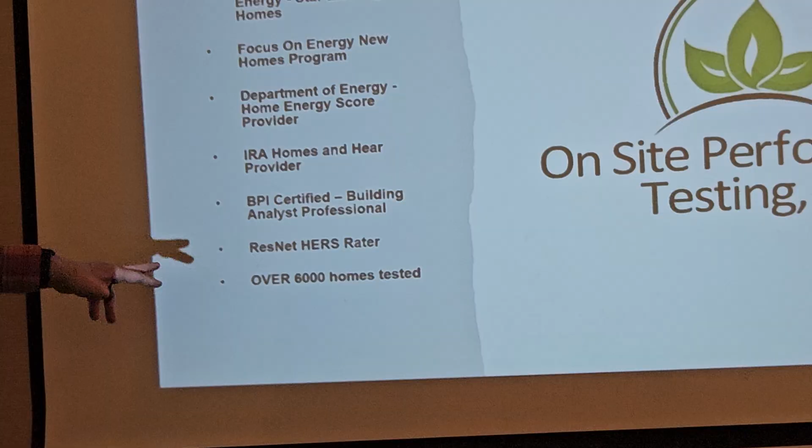And then we also do duct testing. So I don't know how many of you guys realize that in 2016 they passed a code in the state of Wisconsin that any ductwork outside conditioned space must mandatorily be pressure tested and sealed in construction. So if you come up on a house, ask the question: was this done? This number at the bottom here is slightly outdated. We're creeping in on 7,500 houses now.

Blower door testing. Who here hasn't seen a blower door test? Everybody familiar? Okay. Pulling air out of a building, in most cases. We do have the ability to pressurize a structure. We don't do that very often, but there are a couple rare occasions where we have to do that. The house that has vermiculite - everybody knows what vermiculite is, I assume. We cannot depressurize a vermiculite home, but we can pressurize a vermiculite home, because now we're pushing air out of the structure instead of bringing air through that product and into the structure. So in those cases, we will pressurize.

What information do you get from pressurizing it? Same leakage numbers, yeah. We just have to flip my fan around, because it's always a one-to-one exchange. Whatever goes in must come out, or vice versa, depending on the direction. Because otherwise, your pressure would continually increase or decrease depending on which direction you're pushing. If you're maintaining a constant pressure, one out equals one in. So when we depressurize a house, we know how much we're pulling out, but it's only pulling out what it has the ability to pull in. The same thing can be true going the other direction. Because of the vermiculite, you're not pulling it in because you don't want those particles coming in.

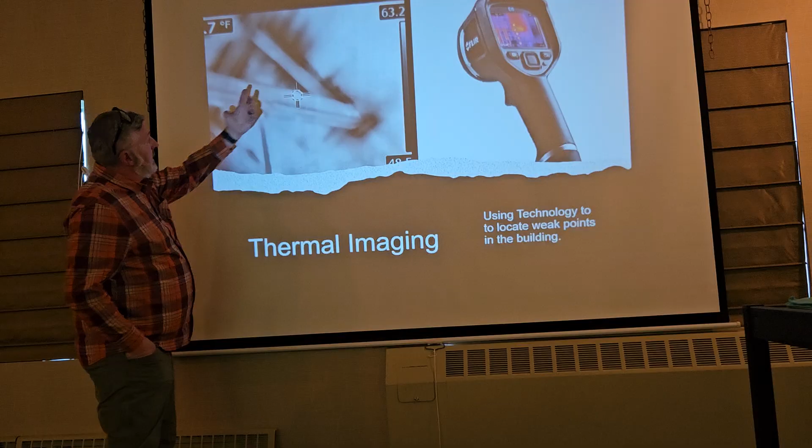So now you can kind of see it - I cut the picture off a little bit, but this is the lowest temperature found on the screen, looks like it says 48. Highest temperature on the screen at that given moment was 63.2. I can't really see what my indicator was, but as long as the external temperature was colder, that's what this is representing, and we were actually depressurizing, so we were sucking that cold air in through the penetrations and openings in the structure.

So what did they have to do to this? They had to go up there and pull all the molding off around all that and inject foam or caulk into those seams to actually air seal things, not only for air movement, but what travels with air? Water and heat. So the air leakage itself probably wouldn't be an issue other than on the pocketbook, but the water is going to ruin the building.

So duct blasting - has everybody seen, anybody ever dealt with duct blasting before and what that's for? This is to determine leakage in a duct system of a building.

So there's a couple different ways we have to do it. In new construction, if the furnace is not in place and we consider the ducting in a rough-in stage, we can just seal off the ducting and pressurize it and measure the leakage. If the whole system's in place, we actually have to pressurize the structure, because the ducts are an extension of the building at that point. So we pressurize the structure and then we can figure out how much the ducts are leaking by pressurizing the duct system to get it to balance out to zero.

So depending on when the contractor actually calls us, we prefer to go in there at rough-in stage, but sometimes they forget to call us and then we get to do it at the end, which requires not only a duct blaster but a blower door at the same time, so it gets a little more complicated.

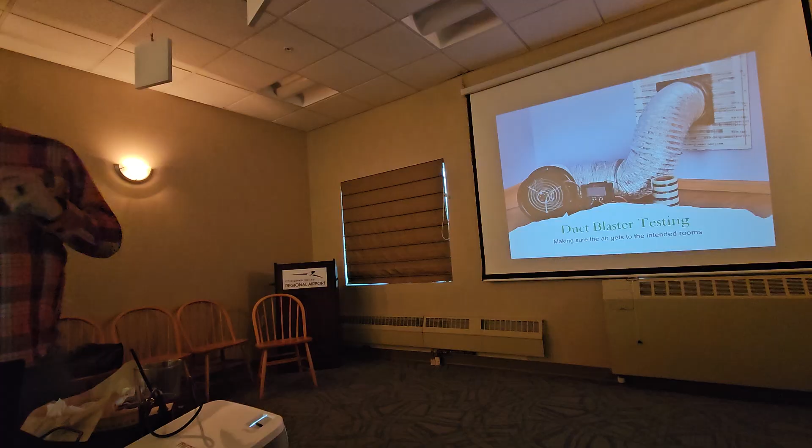This is going to be a much more prominent piece of equipment if the new codes pass in the state. Rumor has it that they are discussing going to either 2018 or 2021 energy codes in the state of Wisconsin in the next 18 months. They're in discussion from what I understand.

And then we do combustion safety testing. So what that generally applies to is chimney vented appliances. We also will test carbon monoxide output on condensing systems.

Does anybody know why that system's a potential problem? I'm sure you guys have all seen them. It's an old oil burner with a barometric damper going up a chimney.

So let's say this customer had this furnace in there and they loved it and it was producing all kinds of heat, which is what they do. But then they decide to air seal and insulate their house and put in a new 600 CFM kitchen exhaust hood. You think that furnace is gonna have a problem?

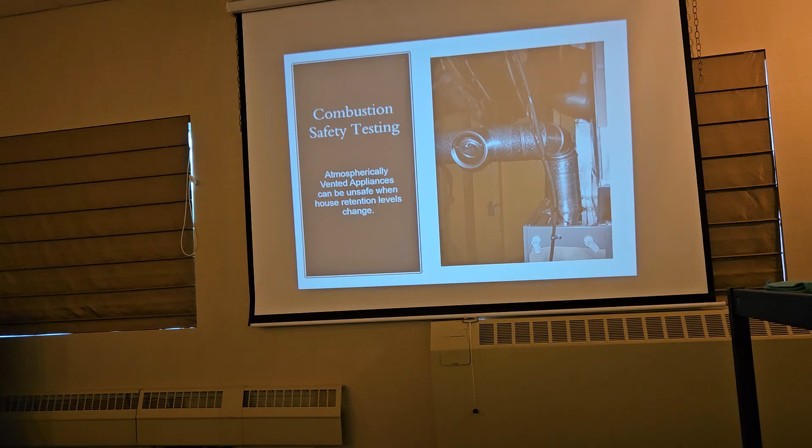It's gonna backdraft that sucker right into the building, and those old oil furnaces put off a pretty nasty amount of carbon monoxide. So these are the types of things we check when we're out on site to make sure that there aren't any problems with those systems that are gonna create bigger problems for the homeowners. So we test those things.

New construction, we get involved with new construction, helping builders and homeowners work their way through that complicated process to eliminate any potential issues throughout that build.

I left all this stuff in here just so I could touch on it briefly with you guys. There are a multitude of different programs in the state of Wisconsin right now as far as energy rebates or incentives for customers and homeowners. Everybody's probably familiar with Focus on Energy. That one's been around since 2001, I believe.

And then about, it would have been August of 24, the Inflation Reduction Act was rolled out in the state of Wisconsin. That money is still here and still being used in the state of Wisconsin.

So there are opportunities for your homeowners to go through these programs and get a bunch of money to help them work through. And this isn't just insulation stuff, this is heating systems, water heating systems, all kinds of different stuff. So again, I'm not gonna spend a bunch of time on this unless you guys have particular questions about it. This just kind of goes through the process.

The one big thing about the Inflation Reduction Act is it's an income qualification. There's 3 different tiers, and I'll hit that in a second. There's money available for everybody. It just, depending on where your income lands, kind of dictates what you're going to be eligible for. And everyone requires an energy test, and then they have to work within the network of contractors to get any of that money.

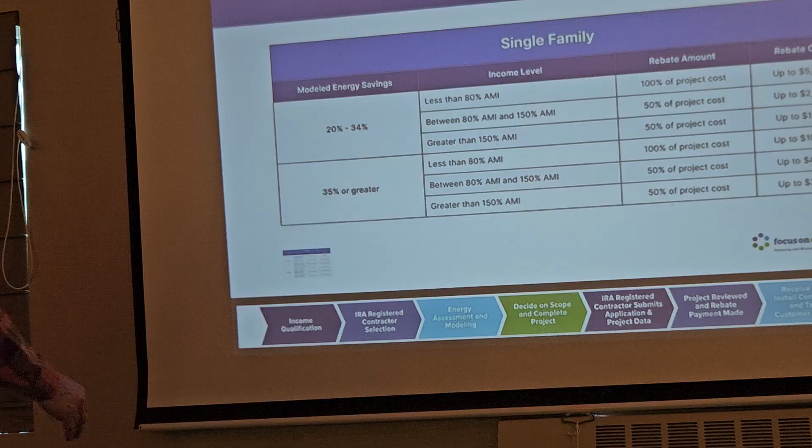So again, as you see there, depending on where you fall on the income scale, we'll ignore this part for now. That kind of dictates where your costs are going to be. This is projected energy savings, and that's all done through the software that the DOE provided for us.

And that can get pretty crazy. So the energy savings numbers are projected by the software, and so when we go out and do an assessment, we have to do basically a full data collection on that structure. I mean, right down to appliances. And then we have to collect all utility information for 12 months from those homeowners, and then we have to take all that information and put it into the software, so the software can align all those values and make sure that everything is entered as it should be.

And then we get to say, okay, well, we're going to change A, B, and C, and based on those changes, it'll project an energy savings score, and then that again dictates where incentives fall.

IRA registered contractors. I tell my homeowners, think about the medical industry, and you gotta go to your in-network things. Same thing. Again, it's government programs.

Energy assessments are required for all that stuff. Combustion safety testing, ventilation equipment, thermal scanning. We went over a lot of that. This is modeling software. Here's a couple cool things that this new modeling software does do.

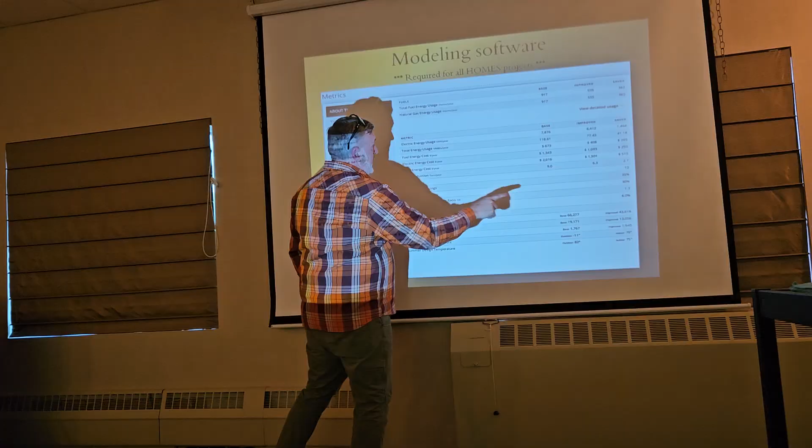It'll tell you your total fuel energy usage, electrical, fuel, CO production, if you're into that. But here's your total energy savings. I just grabbed a random house, but this house was going to see a 35% energy savings.

Here's where it gets interesting from my perspective. So based on the workload they were doing, here's your heating loads and cooling loads. This is pre, this is post. So by doing the insulation work, they've actually lowered their heating load requirements for that particular structure and their cooling load requirements.

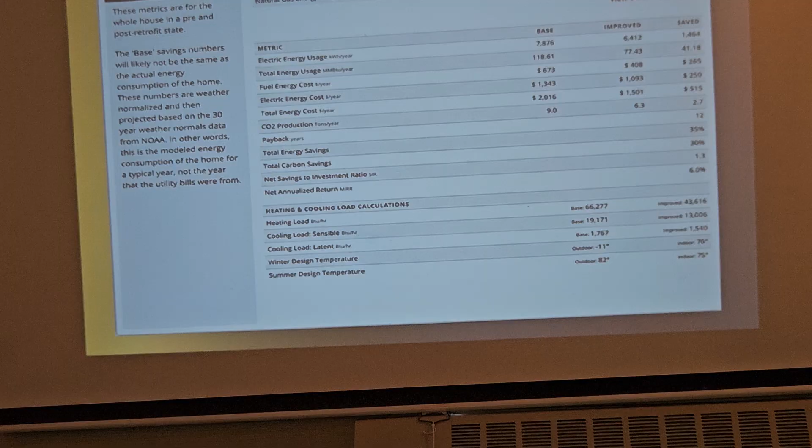How many of you guys have walked into a house and you're like, oh, this 1,200 square foot ranch has a 100,000 BTU furnace sitting in the basement? That's terrible. So when we do these things, we can actually say, even based on your house in its current state, what their projected heating load is, and then they get to call their HVAC guy and say, what the hell did you put in my house? Because it's going to short cycle, or they put a 4-ton air conditioner in there and the load's only 12,000 BTUs, right?

So this is a really useful screen. It's one of the reports that this thing generates. Most homeowners don't know any of that information, but for people in the know, it's super useful.

And this was the work scope that was happening. I think this is the same building. They were doing air sealing and increasing their ventilation, and usually that's a new bathroom fan. They were obviously doing probably an attic rework with the air sealing in attic, probably box sills in the basement, then they must have been dense packing the exterior walls of the structure.

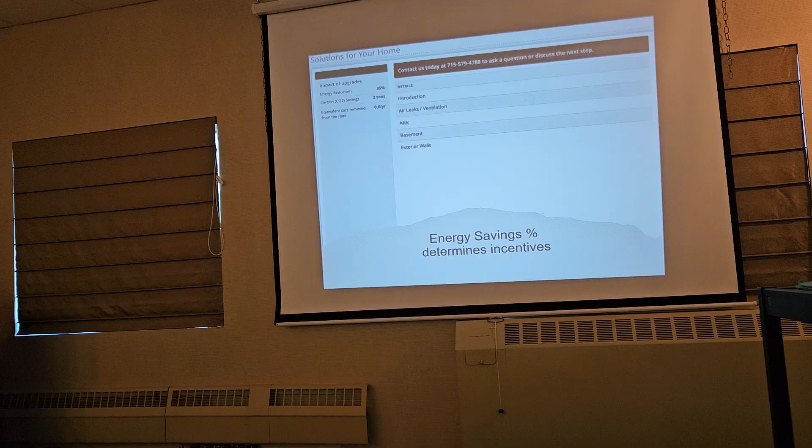Then this kind of just goes through the process. You determine your work with your primary contractor, have your work completed by your contractor.

And this just talks about the different processes through that program. We're going to get into a bunch of this stuff. The quality installation side is every project gets QC'd in that program, and the Focus on Energy program. So not only do we QC the projects we work on, the program actually QCs every single project in the IRA program as well.

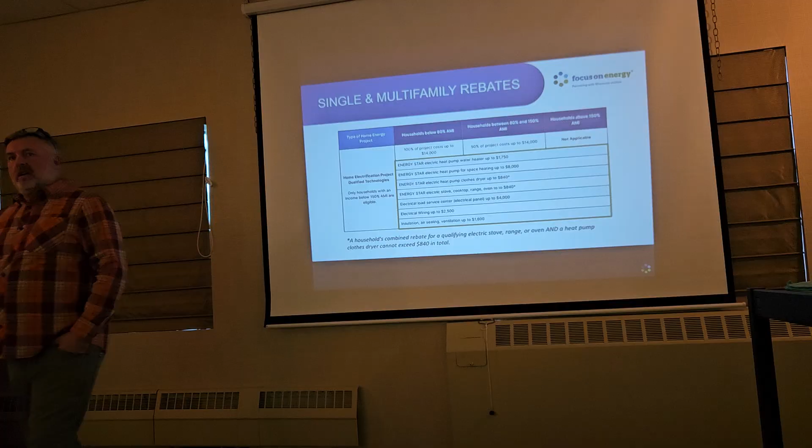And then they got multifamily stuff. This is the heater side of it. This is your heat pump water heaters, your heat pumps, your clothes dryers. There's even some money in here for, and I'm sure you guys see this opportunity a lot, your load service or your panels. You walk into some of these old farmhouses and they still got fuse boxes in them, right? Or 100 amp services. There's up to $4,000 to have a 200 amp service installed. And then there's some additional wiring here. This usually comes into play if there's a safety issue, an old fuse box or knob and tube wiring falls under that one too. So there is some opportunities on that side of the scale for that.

That's just eligible equipment, heat pumps, blah, blah, blah. You all know what those are, right? You guys been seeing some of those popping up out there?

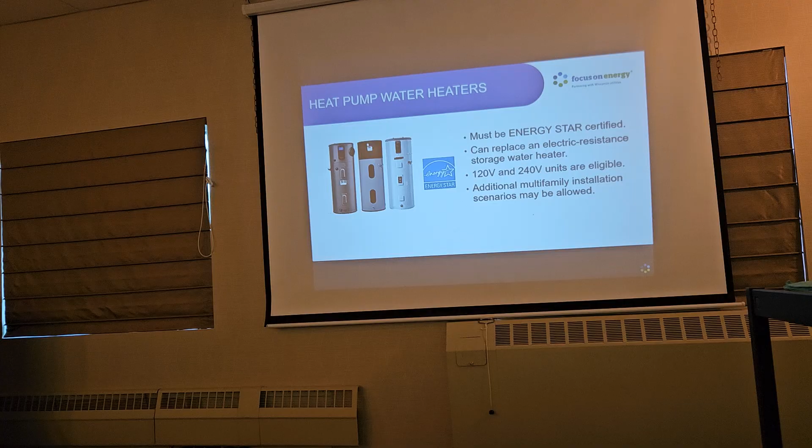I have a question about those. Just thinking about it in my head, so it's pulling the heat out of the air, putting it in the water, right? Essentially. So I can see how that'd be awesome in the summertime, but in the wintertime, aren't you just taking the heat that you paid, the air that you paid to heat? Yep, and I got a slide in here later, but we can touch on it. I just say you're robbing from Peter to pay Paul, right?

So what the industry has done is in these little control panels now, they've given you the ability to turn the heat pump mode off in the wintertime. So in the wintertime, they're just standard electric systems. We'll touch on those a little bit more with some pros and cons as we get deeper into this. That's typically what I kind of tell people is that I would switch it to an all electric. Absolutely. And that totally makes sense, right?

How many of them do you think? Idiot here. How many of them do you think will actually do it? No.

Right, exactly. Okay. So I'm not wrong in saying that.

One thing you guys should watch out for, and I'll touch on this again as we get deeper: these systems require a 15-foot radius around them. You can't shove these in closets because they rely on the temperature of the air. Imagine shoving that thing in a closet - it's cooling that closet over and over, and pretty soon there's no heat for it anymore.

So, could you store your meat in there then? Probably, yeah.

Little side story - I got a builder up in Minocqua. He bought an old house, completely remodeled it, an old 80s split level, walk in, go up and down. He put one of these in a utility room that was about 10 by 10, and that utility room happened to be open to the basement. He was allowing that thing to cool that area, and all that cold air was dropping down into this little storage room in his basement.

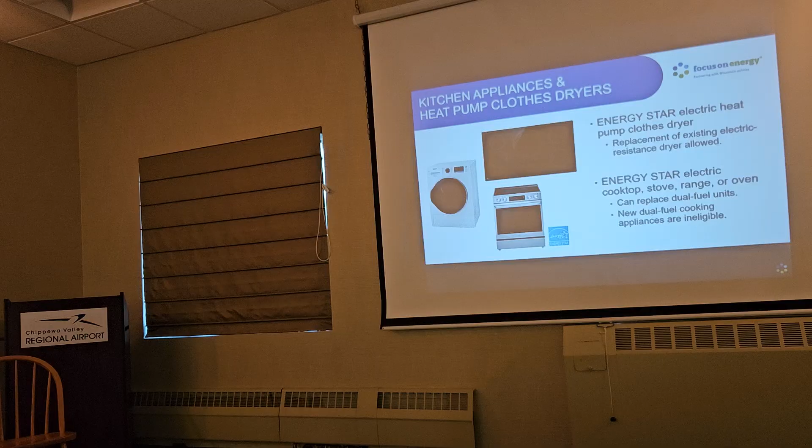Pretty cool, more stuff to break and go around. Well, that's today's world, they're all gonna break. You know, washers and dryers last 4 years now, and they're twice as expensive as they used to be.

I'll give you a firsthand example. My daughter lives in Atlanta, and she bought this 2-story house, and she wanted to put a laundry room on the 2nd floor in an internal wall, in an internal closet. She didn't want to have to get an exhaust pipe out, so she put one of these in there - problem solved. All you gotta have is a condensate drain, because they don't exhaust.

They don't exhaust, they're heat pumps. There's no exhaust on them. And it's an all-in-one - you put your clothes in there, it washes them, then it dries them, and then it tells you they're done. Takes about an hour 45. So I'd say one of the downsides to them is capacity - you can't overload them.

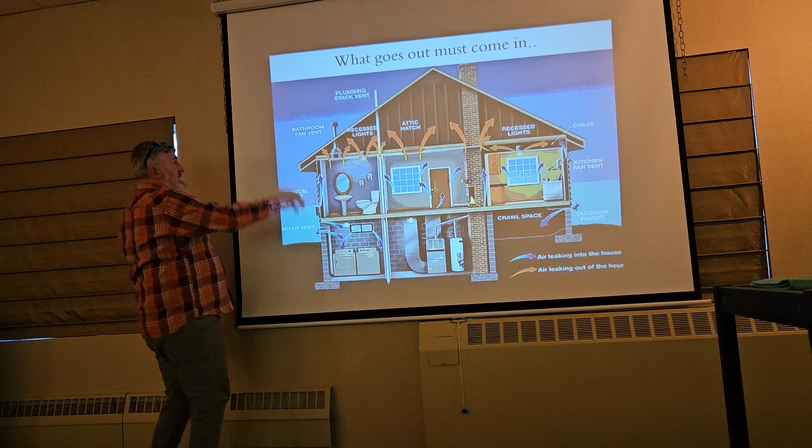So we'll get into the building science stuff. Again, some of this, I know a lot of you guys understand. This is an example of stack effect and how the pressure in a building works during your typical heating season. Red arrows are exhaust, blue arrows are intake, and the taller the building determines where your intake stops and your exhaust starts. So if this was a 2-story or 3-story building, that pressure scale changes as you move up and down the structure. But what goes out must come in.

So the leakier your attic is, the more your building is going to compensate for that by pulling cold air in wherever it can. The bottom of your house is always your lowest pressure point in your building. The top of your house is like Dave from our office says, your house is nothing but a hot air balloon that's too heavy to get off the ground. So the pressures are upward and outward.

So the objective is to try to seal up as much of that as you can, and then, and only then, do you worry about the actual physical insulation or R-value piece of it. And we'll get into some insulation stuff here too.

But this one I'm sure you guys deal with, or at least see the aftermath of when you're doing home inspections. How many times do you go through and look at the bottoms of the windows, especially on wood windows like this one, and that's all black or the stain's all gone. It's not a window problem 90% of the time. I mean, you got your rare occasions where somebody left a casement window cranked open when it rained and it caused a problem, but most of the time this is an internal humidity issue.

This is a big one. Window coverings make it worse. You see all these companies out there now that love to sell those pull-down honeycomb accordion shades. We call them window wreckers, because they actually have thermal capability and they will keep a little bit more heat in your building, but at the same exact time they are going to create dew point issues on the back side of that window and will absolutely destroy your windows.

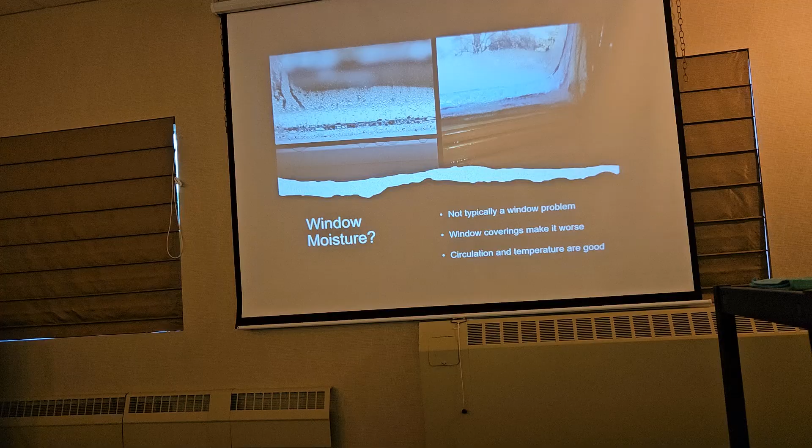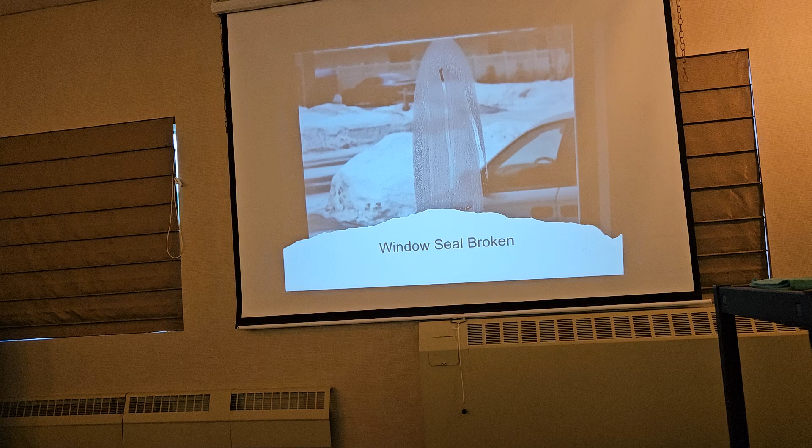Broken window seals. Everybody's seen those. Do you know why that's doing what it's doing? Why is that moisture forming in the middle? Flexing towards each other, yes, but only in one direction.

Heat always travels warm to cold. So in the wintertime, when you see this, what's happening is that glass pane on the inside is concaving and flexing to try to touch the outside pane. This is a pretty big picture window, so that glass has a lot of flexibility to it. Have you guys ever shown up on a job site and seen a window like this where either the inside or outside pane is shattered? That's because the seal was shot and it didn't have enough flexibility based on the operating temperatures happening internal and external, and that glass finally got to its literal breaking point and shatters internally.

I've seen it go both directions. Happens in the winter, obviously, on the inside pane, but I've seen the outside panes do the same thing when people are air conditioning to 63 degrees in the summertime on a 95-degree day. You can have the same impact, just in the opposite direction.

This is kind of a guideline, and this information's out there, you guys can find this wherever. There's also this version where you can actually calculate it out. In air temperature, the one thing they don't have in here is the window, because the window is the other piece of the equation. A single pane piece of glass is going to condense quicker than a double pane, quicker than a triple pane. But you can get these charts out there too.

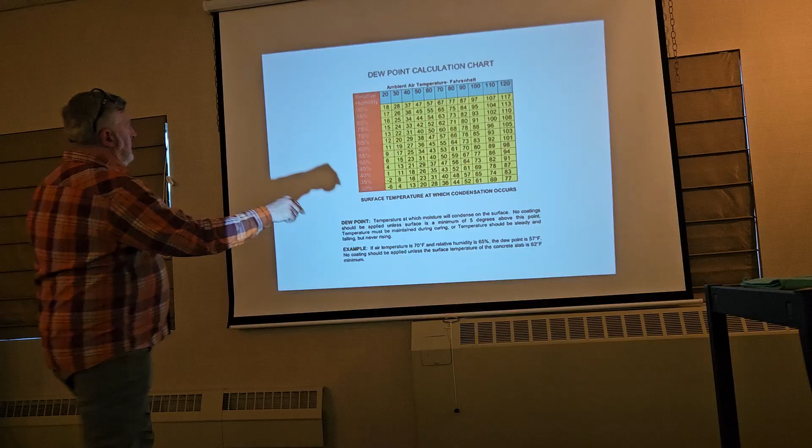So you can actually say, okay, it's going to be 20 degrees today, and my humidity in my house is 40%. So you can be proactive. Start getting my humidity down because I know it's going to get cold outside. It just gives you a good ballpark idea.

If I go back to this other one, for most people this is a pretty safe zone right here, 30 to 35%. How much of our time do we spend below zero? Very, very small. So we adjust accordingly from those points. 30 to 35% is a pretty safe zone. And those temperatures are based on lows, not highs.

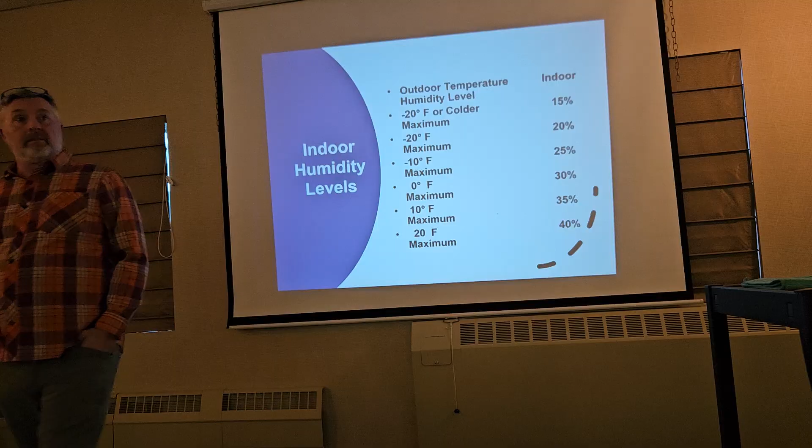Do you know what the medical industry tells you? This is as low as they ever want you to go, and they want you to go all the way to 60%. If you do that in the state of Wisconsin in our winter, you are going to have problems. And it's always young moms, oh, my doctor said 55%, I gotta keep it at 55%. I said, what's worse, a little dry air or that? Because that's the alternative.

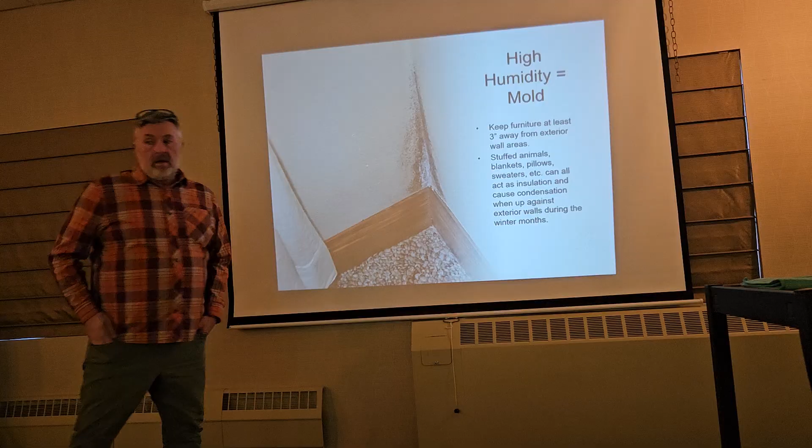This one, can't tell you how many times I've walked into a little kid's room, there's a stack of stuffed animals against the wall, and you stick your hand behind it and it's dripping wet. Because what does every young mom do? They stick a vaporizer in that kid's room because they coughed once, and now they saturate that space, and the back of all those stuffed animals, which you know they're gonna shove in their mouth because that's what they do, are likely covered in mold. And they don't like to listen.

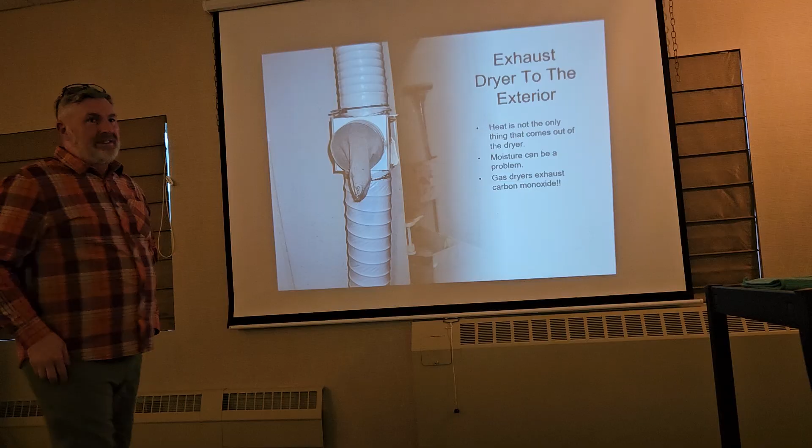Yeah, that's a no-no. And how about if they're doing it in that situation? What else does a gas dryer produce? Carbon monoxide. Also, the plastic tube is nice.

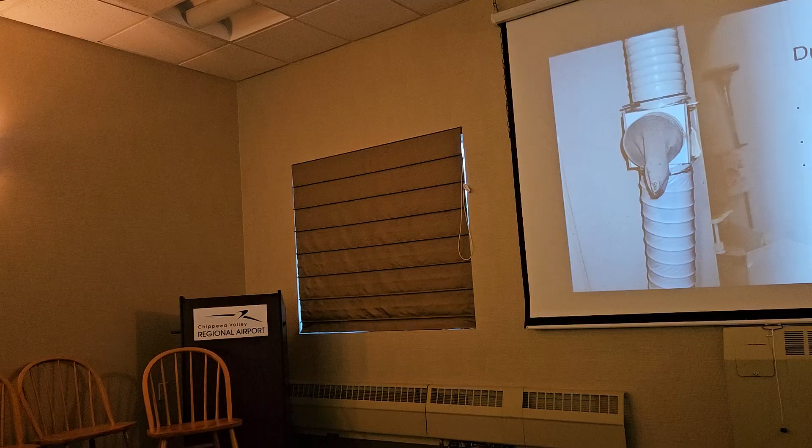Right, and that's another thing. Good catch. Plastic does not belong on anything that gets hot. So how many of the houses you go out that are vinyl sided have vinyl flapper discharge points for a gas dryer? It's gonna warp those things in about 6 months, and that thing ain't gonna stay shut. If it's hot, it needs to be metal. Plain and simple. Don't overcomplicate it.

We're getting into a little bit of combustion safety here. You guys have all seen these atmospherically vented water heaters, and then somebody told them that if you insulate around your pipes, you'll save a bunch of energy. Oh, yeah. Or you could melt them and start your house on fire.

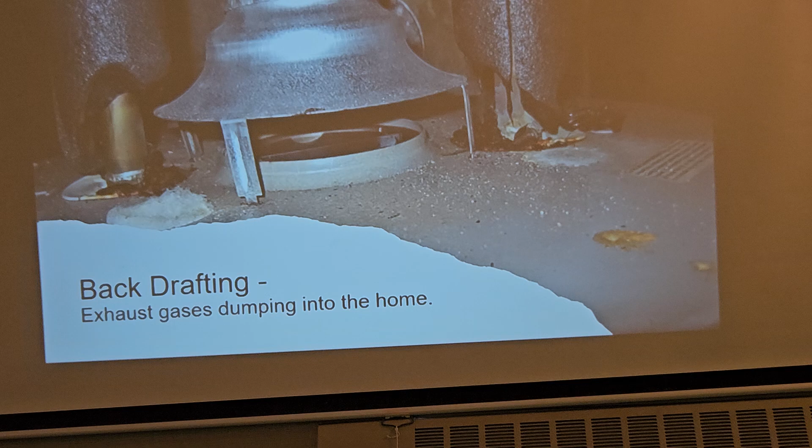First thing I do when I walk into basements and I see that pipe wrap on there, take it off and throw it on the floor. Say it doesn't belong there, it's a safety hazard for sure, or I'll hand it right to the homeowner and say throw this away. And once you bring it to their attention, they're usually pretty, oh, holy shit, you know?

But does everybody understand backdrafting and how that happens, and what it is? Explain it. Good, okay, for the video. So...

I wish I had a better picture. So one of the things that, and this should be maybe something you guys watch for too, and I don't know what your rules are, does everybody understand why water heaters have a 3-inch chimney?

Or better question, what determines the size of a chimney? How much heat is actually going up that chimney? If a chimney gets too big, and you see this a lot when the chimney used to supply the furnace and the water heater, and they left the old 6 or 8 inch pipe going up. Well, now the furnace has been changed out to a new condensing system, so that's not using it at all.

So now you get this orphaned water heater that's now 3 inches, maybe 38,000 BTUs, dumping into a 6-inch pipe, and you see what looks like water running down the outside of the pipe. It's not drying that chimney properly, and it's also not drafting well.

Chimneys have to be sized based on the BTU output of the appliance going into them. That also applies to old wood burner fireplaces and things too. As these systems get more and more efficient, there's less heat going into those chimneys.

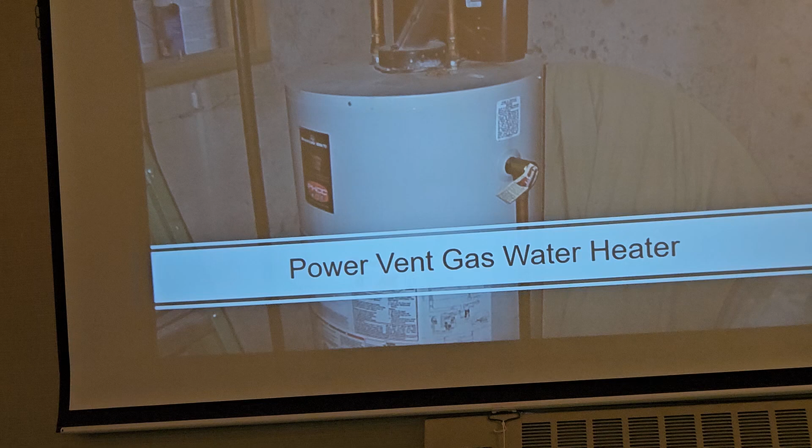This is a solution to that problem. It's got an inducer motor, just like your furnace does. Now, some people don't like these because they're noisy, but I guess I'd rather have a little hum in my basement than gas in my basement.

So, can you convert? You can't just convert. Years ago, you used to be able to buy conversion kits, but my recollection is there was a point probably 10 years ago where the retrofit kits were more than the water heater itself. So everybody just started replacing their water heater.

I've on two occasions seen people remove a power vent water heater, put in a natural draft, and connect it to the PVC pipe. That's a bad idea. Of course it goes horizontal across the basement, and not only that, it melts. And not only that, power vents are more efficient, which allows them to use PVC, because that's all based on heat production again. That's a terrible idea. Yep, the PVC's turning black.

I had one time that was a chimney vent that went up into an old chimney, and on the other side of the chimney, the dryer went up into the chimney. Every time they turned the dryer on, they were basically blowing out the water heater.

Electric standard water heaters, the most expensive way to heat water, but pretty bulletproof for the most part.

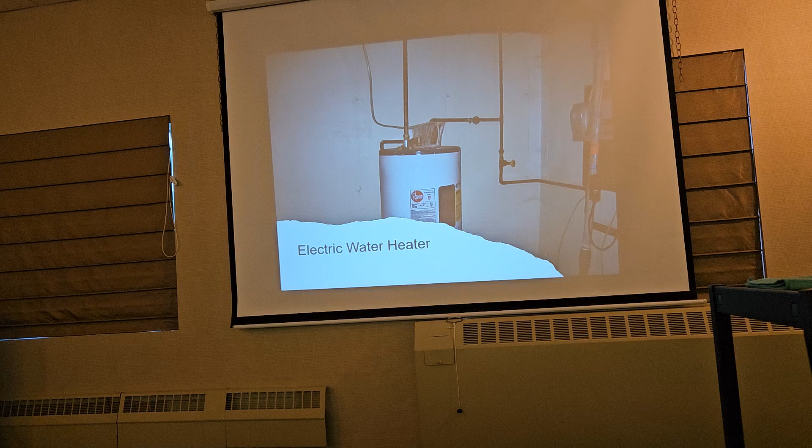They serve as a dehumidifier, so now we've already eliminated another product out of that person's basement. And in the summertime, awesome, they're taking all that heat, they're actually cooling a 15-foot radius between 10 and 15 degrees with average use. And of course, the more it's used, the more it cools.

It robs from Peter to pay Paul during the heating season. That's a con, in my opinion. That's why the industry, when these first hit the market, they were heat pump only. Over the last 5 to 7 years, they've actually started to add those modes.

And they have to have ample space to operate, because you will create a literal walk-in cooler if you put that thing in too small of a space. And when there isn't ample heat for that to draw from, you're affecting its efficiency to do its job. At that point, you might as well just turn the dang thing into a traditional water heater.

Now, my dad has one of these in his garage in Florida. All day, every day, couldn't be better. Cools his garage down. There's so much freaking heat down there, it don't matter. Fantastic application. We don't live in Florida, so.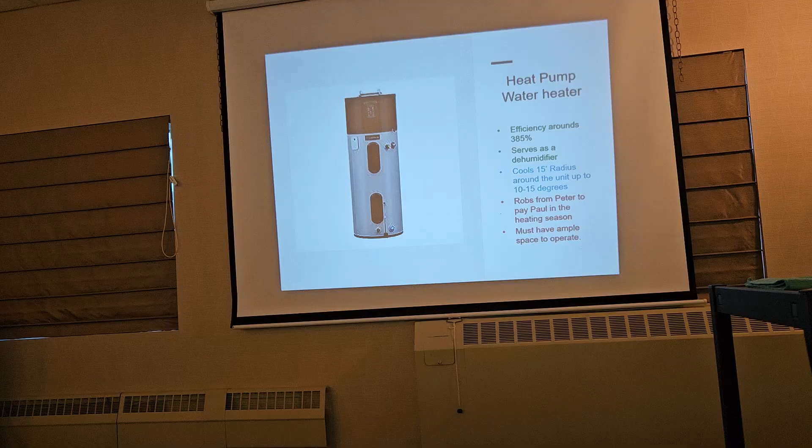I actually took that drain valve out, because it's not a full-size 3/4 inch valve. And I put a full 3/4 inch valve on there. So when you open it and drain it, it drains fast. Oh yeah, you can get a lot of stuff out there. You guys ever see these?

Maybe. These you're generally gonna see, so for those of you that don't know what they are, they're circulation pumps. And they're generally set up in houses where you've got a second-story master bath on the opposite corner of the building. And they don't wanna wait for water.

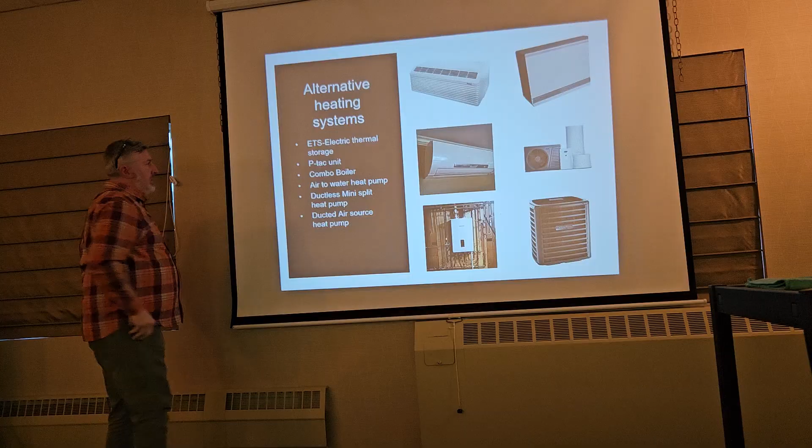Everybody, I'm sure if you've been doing this for any period of time, you know what these ETS systems are. Anybody that doesn't?

So ETS stands for electric thermal storage, that's the one in the upper right-hand corner. Those were super popular in the early 80s, when all electric homes were popular. That was also a time when they were doing a lot of on-peak, off-peak heating. Basically, there's a pile of bricks inside that thing. At night, when electricity was cheap, it would not only heat the house, but it would heat the bricks. Then during the day, when the electric got expensive again, it would basically just run a fan that would blow the heat off those bricks to maintain temperature in the building until the electric got cheap again. They're actually pretty effective units in the right situations. You're not seeing too many of them anymore.

But the north end of town here in the Planets, that was a very electrified neighborhood at one point in its life, in the 70s there. So I've seen more of them in that neighborhood than probably anywhere else in the state.

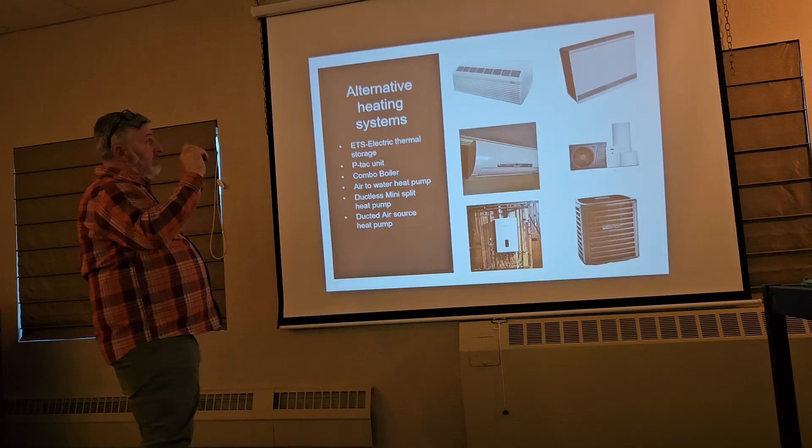PTAC units. Anybody who's ever stayed in a hotel knows what a PTAC unit is. All these multifamily structures that are getting built everywhere, PTAC units. They're basically electric resistant heat that go through the wall. So they are leakers, the air literally goes right through them. They do make a heat pump version of that, but usually by the time you switch that to a heat pump version, your costs get you to a point where you might as well put in a mini split. But you see these a lot in those multifamily structures because they're cheap, and those builders like cheap.

So, combo boilers. See these a lot with in-floor heat, and then they can also handle domestic. Pretty good, but they have to be maintained. They have filters in them, and they have to be serviced every year for sure, if not even a little more frequently. But pretty good.

This is one of the newer things you're going to start seeing in the market, air to water heat pumps. You guys probably all know geothermal, right? That's typically either water to water, which would be geothermal to in-floor heating, or water to air, which would be geothermal to forced air heating. This is the backwards version. So this is actually an air source heat pump that can heat water for an in-floor heat system. So the technology is getting better all the time.

When you get into these inverted, slim, long inverter compressor units, 20 below zero is pretty obtainable for most of those. Mini splits are talking minus 31 now for 75% capacity. It's pretty similar outdoor units, it's just that now there's a conversion from air to liquid. So you're gonna start seeing these, they're getting to be a lot more popular.

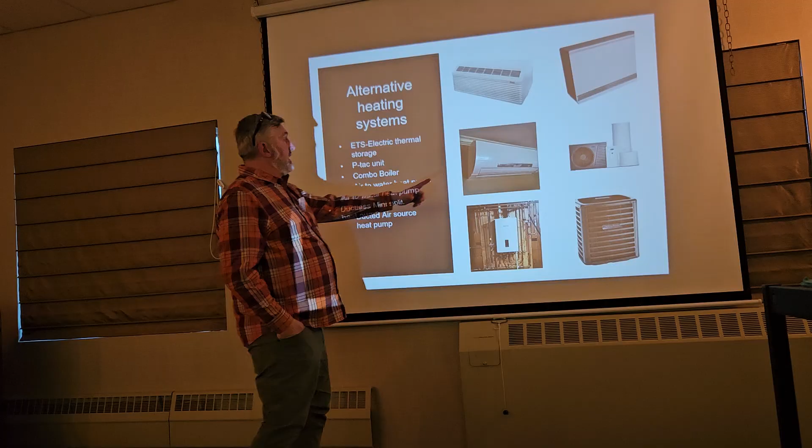And I'm sure by now everybody's seen the ductless mini splits. In those, I'm seeing a lot of mold on the inside of the unit, if they're not keeping them clean. People don't know that they need to maintain them. Also see a lot of issues where when they mount them, they drill the holes through the wall and don't do anything with them, just drill the holes and walk away.

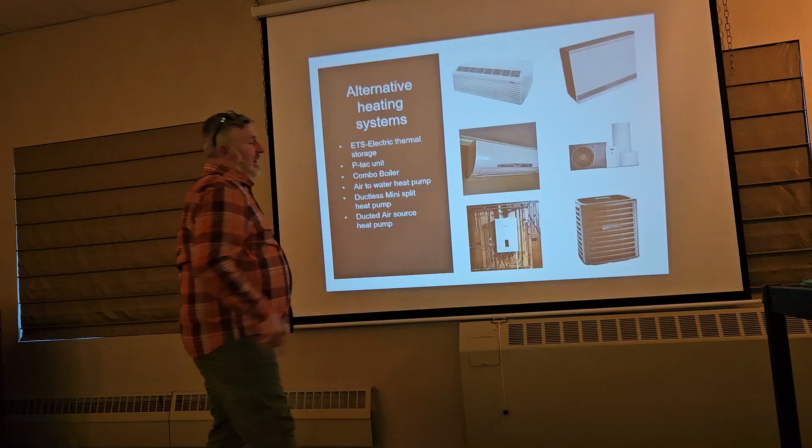But as far as function is concerned, that's about the most efficient air conditioning system you can put in the house. We're talking 22, 23 SEER on a lot of those now, compared to your traditional systems which are 13, 14 on average nowadays. Compared to this, your traditional air source heat pump, the ducted version, even most of those are gonna be 15 to 17 SEER, and those are gonna tap out usually around zero in today's world.

So mini splits are getting really, really popular, specifically in slab houses, because you don't gotta run any ducting. You can put a head in each space and keep each space a different temperature. They dehumidify, they actually have a really cool dehumidification mode you can put them in, where they alter the temperature in the room less than 1 degree, but still pull moisture out of the air. They run at such a slow cycle. So some pretty cool things out there.

Everybody know what HRVs, ERVs are and how they work?

Do we want to waste any time on those? Does anybody not know what they are or how they work? What's the difference? Look at the back. What's the difference? I'm gonna ask you guys. Does anybody know what the difference is?

One belongs in this climate and one doesn't. Do we know what they stand for? Yep, one has the ability to dehumidify and the other one does not. And that's important in our climate. HRVs do not have the ability to control any water. ERVs do, to a point.

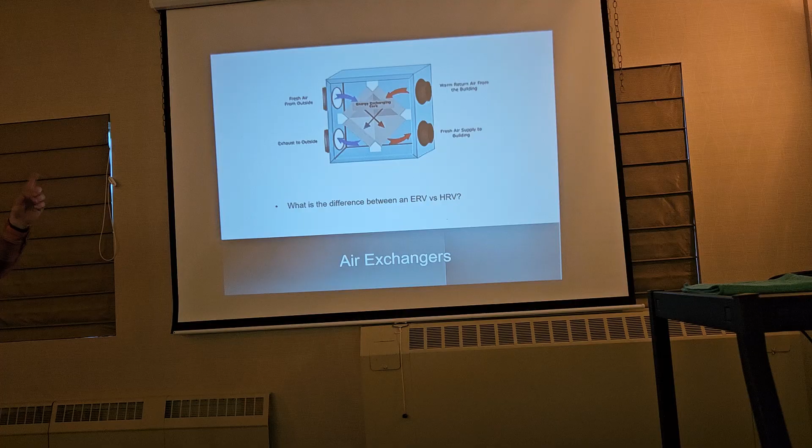Can anybody tell me what the approximate recovery efficiency of one of these is? It's around 70%. They vary, but on average around 70%. So if they've got a 70% recovery rate, that means they have a 30% loss rate. So if that thing's on high and running all day, every day, am I not just pumping 30% of my heat out the side of my building mechanically all day long? So what if I combine that with a heat pump of any kind?

So let me back up. Who can tell me what the biggest problem with heat pumps is? Lack of capacity. Heat pumps are designed to maintain temperature really well. They suck at changing temperature because they don't have that 80,000 BTUs of propane to throw at it, right? Most of them are going to be between 36 and 48,000 BTUs on the high end.

So if I'm pumping 30% of my heat out the side of the building and my system is already a little bit undersized because I'm trying to save some energy - I can't tell you how many times I've been on geothermal projects where their energy bills are $800 a month, but that thing's been running for 12 years. Shut it off, all of a sudden the geothermal can take a breath and catch up, and then it can do its job.

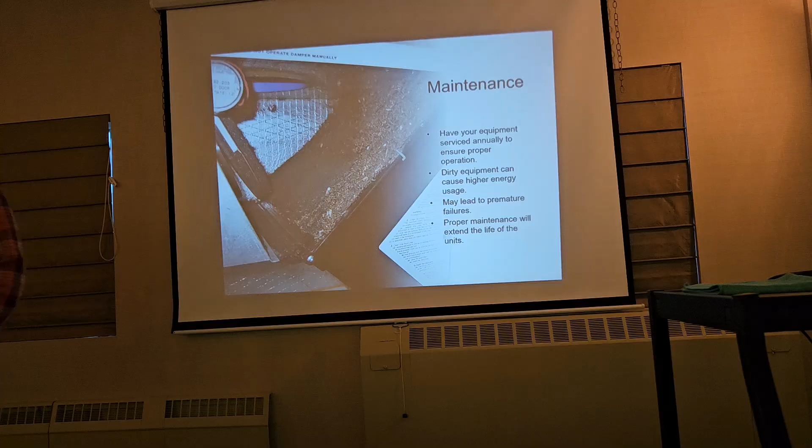So are they really getting fresh air? To be determined, I think. And how many of you guys check the outside ports on them? There's bees in there - a lot of times there's bees in them, because these holes, in some cases, are big enough to let bees in. And you can ask a homeowner, when was the last time you cleaned that? They're like, what's that? We had no idea. Didn't even know it was there, much less what it was for.

So if you're not going to maintain something like that, and you're not going to run it right, don't put it in, because you're just going to create more problems and more trouble with your house for doing it. Do you guys check furnace filters? How many times have they caved in and fallen in the furnace? Haven't been changed in 7 years. Arrows backwards - yeah, arrows are backwards. Yeah, but then you can just flip it around and it's good again, right? Yeah.

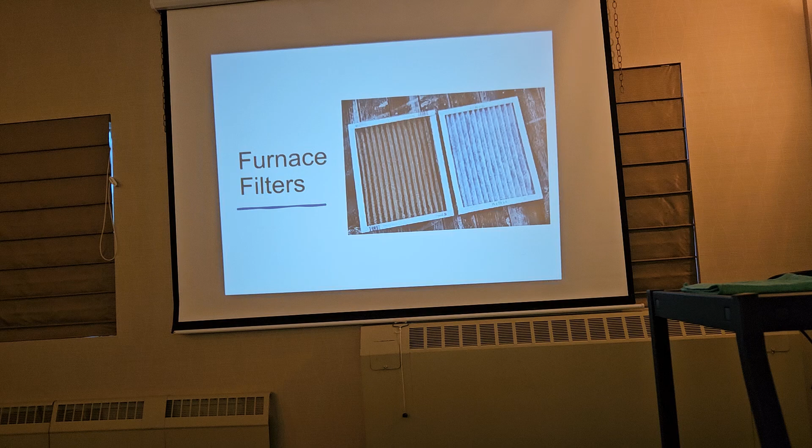I looked at one recently and sent the picture to Jen - it was like a full dog in the filter. Oh, you should see AC coils when that happens. I had a friend who used to have an air conditioning company, and he sent me a picture where he pulled an inch of dog hair off the bottom of the AC coil above the furnace.

It's a good thing there's people like that, otherwise we wouldn't have jobs. Yeah, there's truth to that, for sure.

Place in Menominee I looked at, they had just this tiny little trap door on the floor to go down to the crawl space. Furnace was like 5 years old, and I don't think the people that bought it even knew what was down there. The filter had never been changed since it was brand new, and the crawl space is probably wet and damp.

So switching gears, now we're gonna start getting into insulation a little bit.

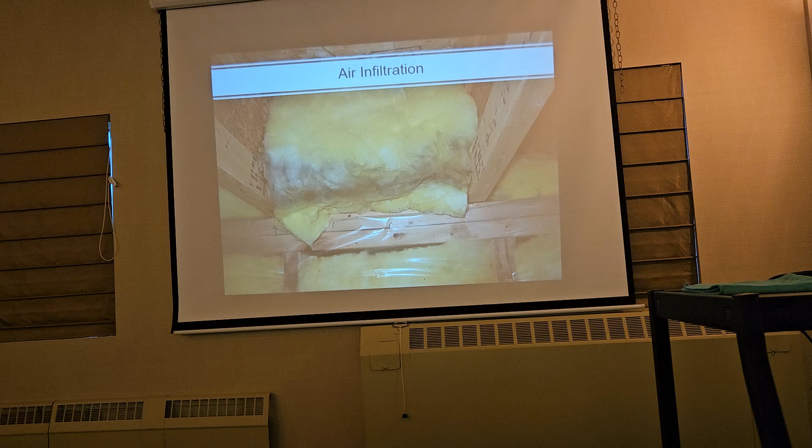Do you guys pull those out ever? Do you ever grab those and pull on them? You ever do it in the winter and they're frozen to the outside of the house? There's suspicion of...

Oh, looks a lot better on my screen. Rim joist, sill box.

Mold - don't like to use that word because I don't test it to see exactly that's what it is, but I think we're all mold-like substance, mold-like stuff, there you go. Possible microbial growth, yeah.

So now, usually you'll see how they kind of fix it - they cut out that pink foam and spray foam around it, and shove that in there. Is that not just trapping all that moisture behind it still? The moisture came from inside the building, so that would be a better scenario than the fiberglass. But the problem with the rigid foam is there's still an air gap. Air gaps are breeding grounds. So the wood, in theory, could still travel some moisture through the wood itself.

This is a better option because the foam bonds directly to the wood, eliminating any air void. So now any capillary action that's going to take place is either going to take place in the wood itself or outside the wood, okay?

Nobody's going to say, what about the off-gassing? The internet's a wonderful place sometimes. As long as you're not there puffing and trying to get hot. Well, and as long as it's installed properly.

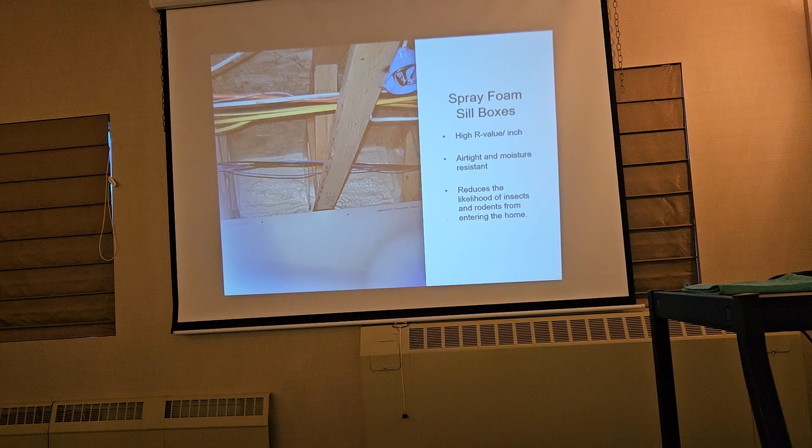Anybody know how to tell the difference between closed cell and open cell when you're on the job? Poke it with your finger. If your finger goes into it, it's open cell, and it should be noted. Like great stuff, soft - well, even some of the great stuff has a little bit of rigidity to it, but true open cell foam, you can literally push your finger right through it with very little resistance.

So what's the difference between closed cell and open cell from a performance standpoint? A little, but that's not where I was going. Vapor barrier, vapor barrier - open cell foam is a kitchen sponge. If it's hard to the touch, it's closed cell because it has closed its cells, so therefore it is no longer air permeable or water permeable. Open cell foam will literally absorb the moisture to the surface.

Seen many houses where they had to tear complete roof systems off because they used open cell foam. Why did they even make open cell foam? Where is its purpose? It was cheaper, and there are some applications where open cell foam can fill large voids. And you can use open cell foam, but then you have to implement a vapor barrier in addition to that.

So open cell foams were good for - I guess the easy analogy would be cathedral ceilings where you got massive roof trusses - they could fill the whole thing. The mistake most of them made is they never put a vapor barrier on it, and the thing just became this massive sponge on the top of their house. But if you vapor barriered that, did everything correctly, it can be a pretty effective R-value boundary.

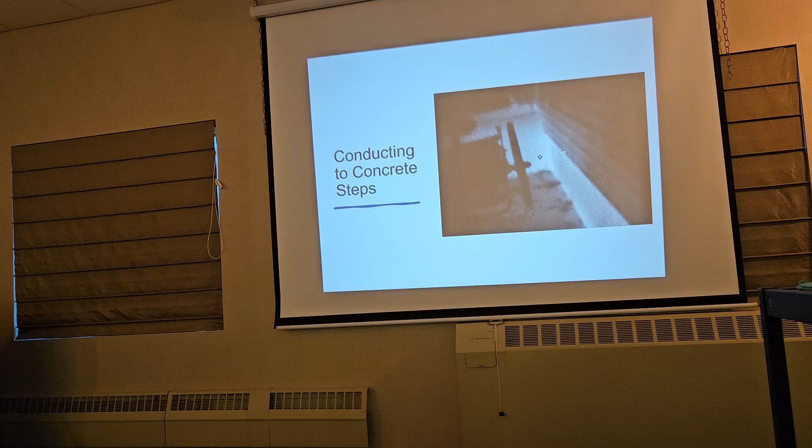Foundation walls - this is a thermal image from several years ago on the outside of a house in the wintertime. That's the concrete wall, and that's actually the poured stoop coming off the front of the house, just radiating heat because it was exposed on the inside of the structure.

A little bit of snow on the edge. That's what the dark stuff is.

Foundation walls. Anybody know the R value of concrete or block? Superconductive. Moves energy very rapidly. Foundation insulation is one of the bigger energy saving items you can do to your building.

How many times have you walked down into those 1960s, 1970s ranch houses and the basement is completely unfinished, wrapped in concrete with nothing on it? If you think about it, half of the surface area of that house has zero insulation on it. It's wrapped in a superconductive material, and all of those surfaces on the other side of that wall are lower than the air temperature of the building.

So I'll switch to the next screen just so I can show you. Imagine for a second this foam board wasn't here. Most houses you're going to have about this much of that foundation exposed to external air temperature. The next 3 feet are frozen ground temperature, so 32-ish degrees.

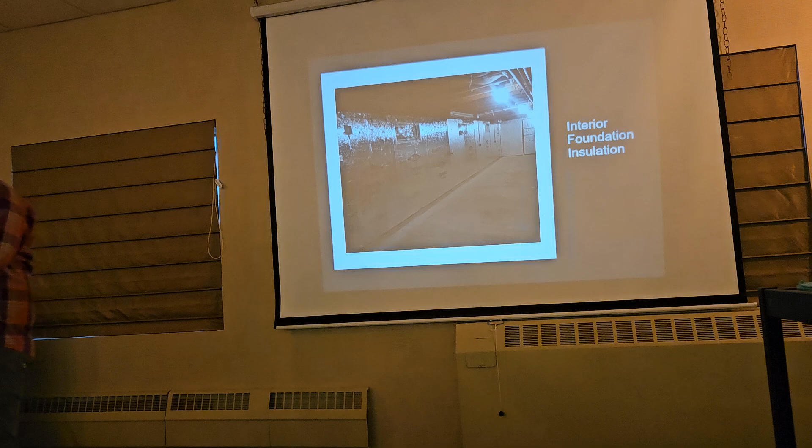From that point down, what's ground temperature? 50-ish, 47 to 55 degrees, depending where you are, water content, soil, all that kind of stuff. All of those temperatures are lower than whatever you're trying to keep your house at, so it's going to be stealing energy at different rates depending on the delta T, the difference in temperature. This is a great application.

This product, and this just happens to be the Thermax brand, is completely fire code compliant in that application. It can be left exposed. The foil facing serves as the ignition barrier, so there is no code requirement for covering it. It's a great opportunity for people to insulate their basements without spending all the money on framing and additional work, because once you frame it, you might as well wire it.

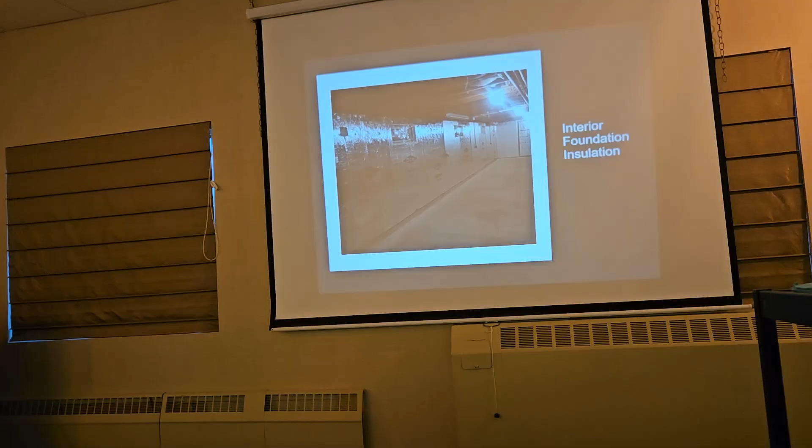That's only given that there's no exposed foam, correct? Right, there's no hole. Yeah, the edges have to be foil taped and stuff, but yes. We're gonna assume in that image that happened, because it looks like all the seams are taped.

Notice why it's not all the way to the floor? They got a leaking system or something? Yeah, it's just water prevention. So if the foundation did ever leak a little bit, it gives it a gap.

Because day one when that foundation's poured, the grading's gonna be nice. Year 27, after all the settling and the composting of the front yard, everything changes direction, and all of a sudden you got water coming in. At least you're not putting the foam in jeopardy, you're still giving it an outlet.

I see most good builders today put 2-inch foam on the outside of foundations. It serves a similar purpose. The only downside to doing it outside is you gotta protect it from the sun and everything else. How many times have you come back to those after the first winter and the coil stock they put over it is all buckled? Because the frost grabbed it.

You're better off doing it on the inside wall, in my opinion. From an R value standpoint, it's a horse apiece, but I would much rather not have to deal with all the BS on the outside.

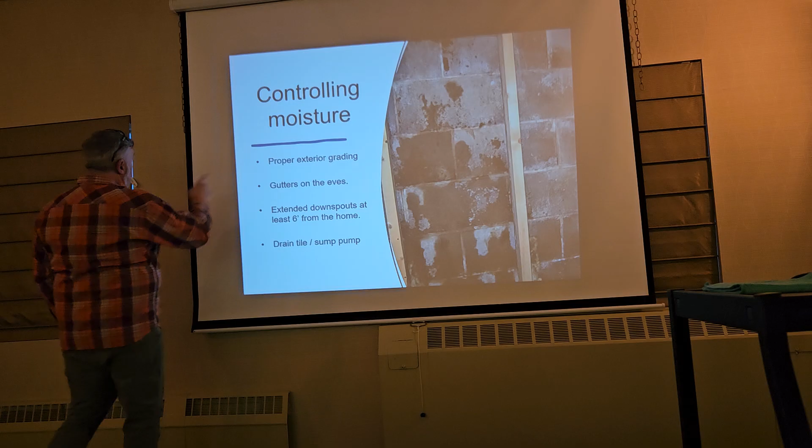Improper grading, improper grading, improper grading. All those 1950s houses that were graded once perfectly have had 70 years of lawn mowing going on, which is nothing but a compost bin. Those front yards, the sidewalks didn't settle, the yards got taller. And now all that water, instead of running away from the buildings, is now running to the buildings. Block walls are hollow.

I've had a couple pretty unique opportunities over the years to where there was so much water pushing up against the foundation walls that I was literally witnessing water squirting out of the block walls.

So there's a couple different ways you can correct some of that. Obviously grading and gutters, get your downspouts out, and all that kind of stuff. And if you have drain tile, great. Sump pumps, great. We had a couple situations where we actually went in, had the contractor go to the very bottom course of block, drill into the bottom course of block, install PVC pipe, run that PVC pipe to the sump bin. We told the water where to go, gave it a relief valve until they could get around to fixing all the mess that was on the outside of the building, which is where most of it came from in the first place.

If you ever notice when you bump into these basement correction companies, and I'm not saying they're bad, they never touch the grading on the house. They always sell them more stuff. They let the water come in and then they try to deal with it once it's in, rather than dealing with the situation. They'd rather cut all the way around your foundation, put drain tile in, and do exactly that. I'm gonna catch the water after it already made it into your house. How about I just stop it in the first place?

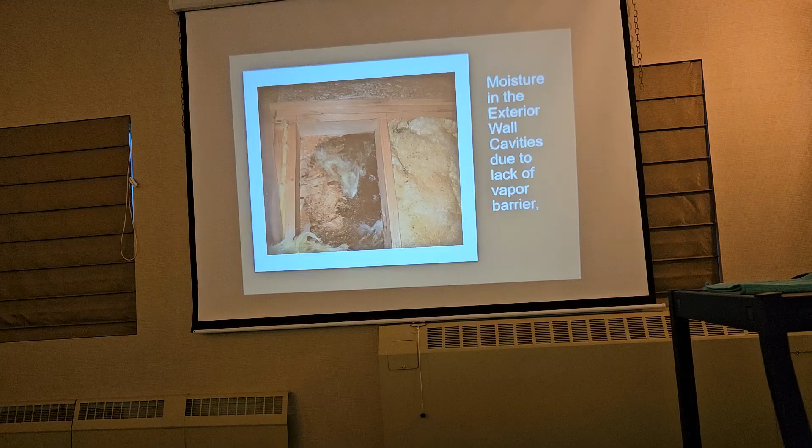This is an exterior wall. No, I think this was a lookout wall. Vapor barrier, it's right there. It just never made it all the way to there, and the internal moisture pushed through, condensed like crazy. And there's that substance you were talking about again. And that's OSB, so that's shot, you might as well get rid of that. Because OSB, when it gets wet, is basically paper mache.

The batting got removed. This is ice. Poor R-value, air movement.

I'm not gonna spend a ton of time on this. I'm gonna say my piece on fiberglass batting. It belongs in one place and one place only, and that's an exterior wall that's completely encapsulated. Anywhere else that this stuff is shoved, it might as well be shoved in a dumpster, because that's about what it's good for.

Wouldn't that work on interior walls for sound deadening? Sure, it would, but the downside of it is it's a very toxic product. That stuff gets airborne, it's shards of glass. I'd much rather use like a rock wool material or even some of the new denim materials. The new denim insulation materials have amazing sound dampening qualities with no toxicity.

They still make that? As far as I know, I haven't seen otherwise. Most of the sound goes through the studs anyway, so you have to almost put a sound board over it. Well, depending, yeah. So you are seeing in some new construction now where they're double walling and offsetting on some of those, especially master bathroom to master bedroom stuff.

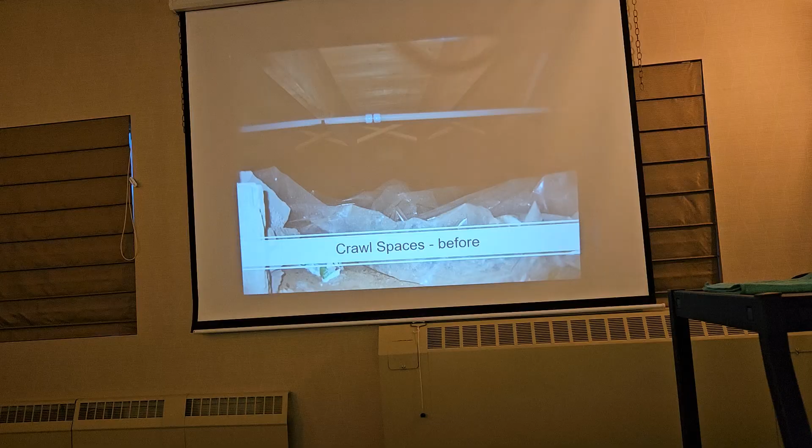Crawl spaces, we all love crawl spaces. They made an attempt on that one, kinda got some plastic in there. Wasted their time, because if you don't seal it, it's doing nothing.

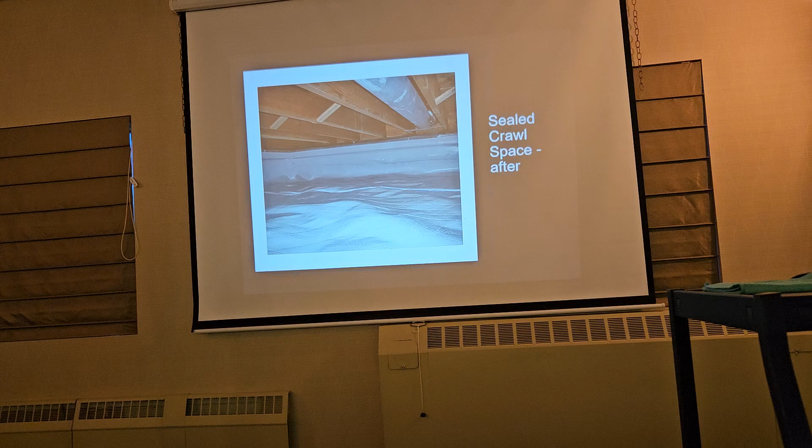That's what a proper one looks like, with the exception of the box sills, they never... maybe we'll just assume they hadn't gotten to that part yet. That's a nice encapsulated crawl space, a nice, thick, durable product that can't get wrecked by somebody crawling on it.

So what are the big concerns with crawl spaces from an indoor air quality perspective? What comes out of a crawl space? Radon, what else? Snakes, cockroaches, feces, termites, bugs, rodents, any other soil gases that might be in there. Maybe your neighbor's septic tank is crap and its leakage is seeping into your house, right?

Put a gasket up, don't let it in. Do that, and you condition that, correct? Yeah, conditioning, yep.

So that's a good question. How do we determine whether we condition a crawl space or don't condition a crawl space? Or what determines the difference, whether it's encapsulated, in where the insulation barrier is?

So if this thing was insulated here, insulated, sealed on the bottom, and had no access to the house, now we can vent that crawl space. Very, very seldom do I ever recommend that. There are rare occasions where that's probably the best situation.

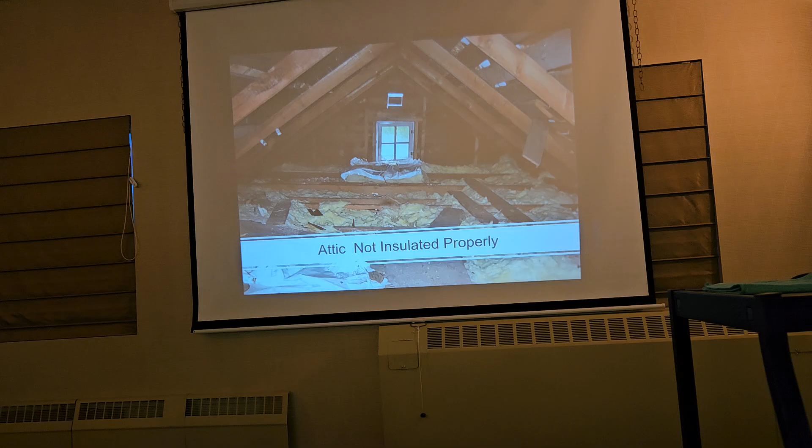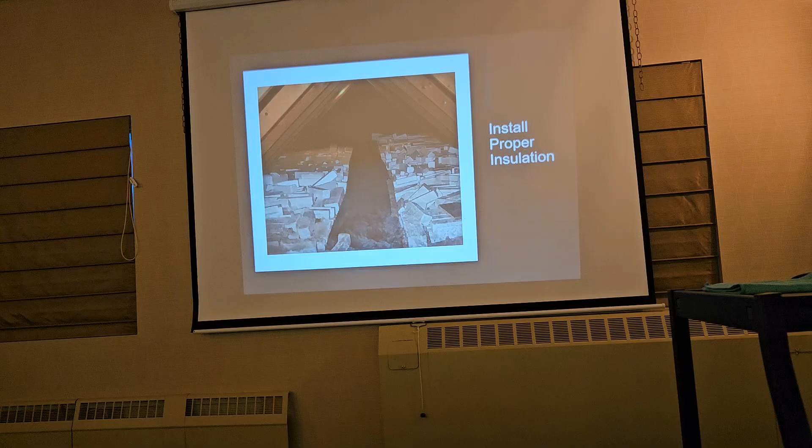Yeah, but it feels better about it. You can say that it made them feel warm and fuzzy.

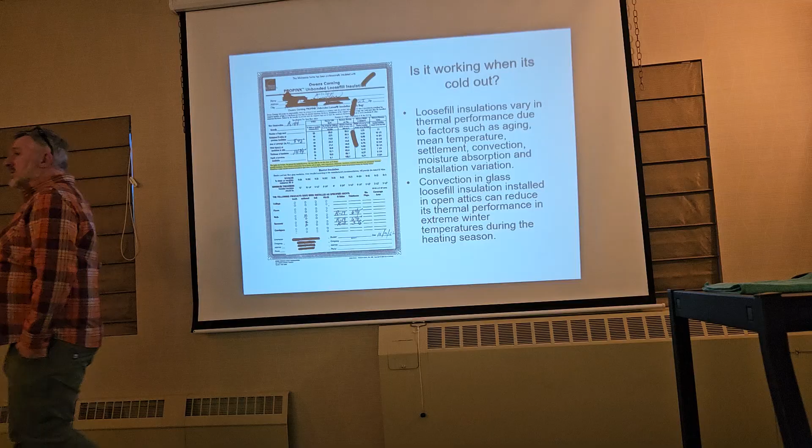I already said my piece on fiberglass, so this is a different beast of fiberglass. I'm gonna beat this up a little bit because I think it's important. So what you see on the right is highlighted in yellow. This is a form from Owens Corning that I pulled out of an attic of a house. Read that right-hand side, especially the bottom paragraph.

What do you take from that? Doesn't work when it's needed the most. Doesn't work when it's cold, and when you need it the most, it's crap. Most studies are showing a 30 to 40% R-value drop at zero degrees.

So I wonder why it's still so popular. Because it's cheap to buy, it's clean, and most of the contractors that install it get kickbacks from the manufacturers.

When did it become cheaper? It's not actually. Back in my construction days, 25 years ago, I remember doing the calculations, and to get an R50 in every square foot, cellulose was cheaper to get an R50 than fiberglass was for an R50. But now it seems like it's the other way. It's about a wash apiece nowadays. I think fiberglass is just a hair cheaper.

That had to do with the manufacturing process, and honestly COVID had a big impact on that. During COVID, the cellulose manufacturers were having a hard time getting product, and they were actually changing the composition of their material. We saw a lot of problems with cellulose during that window of time. It's corrected itself now, but the cost has gone up, so that's where things have landed.

But cellulose will maintain its R-value regardless of temperature. It's a higher density product, there's less air in it, so you don't get that convective movement. Convection - cold air is dense, it's heavy, it falls, and works its way through.

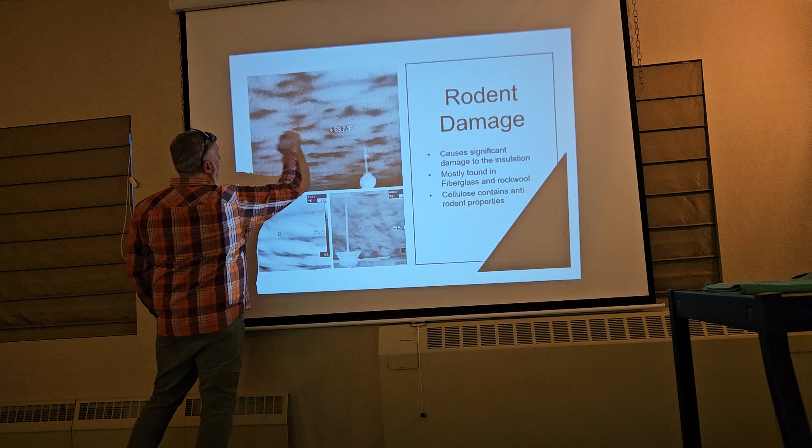That's a lot, they probably have a lot - that's probably 20 years of mice, right? I have witnessed time and time again where someone will come in and take the fiberglass out of the attic, put cellulose in, but leave the fiberglass around the skylight chase. The mice will run across the cellulose to live in the fiberglass. Very rarely will you ever see a mouse burrow through cellulose. The only time you'll see it is if there's fiberglass underneath the cellulose. They'll go through it enough to get to where they want to go, but if all you have up there is cellulose and spray foam, you don't have a mouse issue.

Significant damage to the insulation is mostly found in fiberglass and the old Rockwool materials. Cellulose has boracic acid in it and a few other fire retardants that make it undesirable for critters. That also applies to bats and bugs - you see a lot less of that type of activity in those as well.

How many of you guys have run into this crap? Messiest, nastiest stuff to try to clean up or get off your shirt when you climb out of there. It seems like almost always there's vermiculite underneath that. Yep, because it was all that time frame. And that's a nice precursor to the next floor.

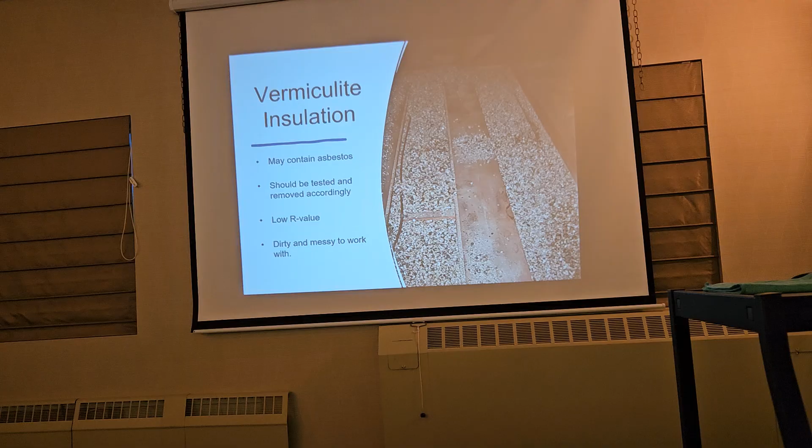In Viroqua, I've literally seen a foot of that crap in houses. I don't know what the deal was down there. What's the R value on that stuff, per inch? Like 1.2 or something. It's pointless, but it's what they had.

In the 1940s and 50s, they loved asbestos. They put that shit everywhere - what doesn't burn? Yeah, it also killed everybody who touched it.

Cellulose - every product again has its place. Cellulose, in my opinion, is the best open attic horizontal surface product out there. Good density, good R value, very little air entrainment, no rodent problems.

Do we ever put cellulose below grade? Super absorbent - that stuff will suck water up like nobody's business.

Hopefully you guys aren't seeing too much of this crap. Yeah, it comes and goes. That stuff is right from NASA, it's really good.

I once had a customer's mom at the inspection ask what I thought of that foil stuff in the attic. I said, well, it was a scam. She goes, oh, we did that in our attic. I got to be in the middle of a husband and wife literal screaming match at their house one time because he was super proud of it and she knew it was a scam. When I confirmed it, he had a bad day - broke up the marriage.

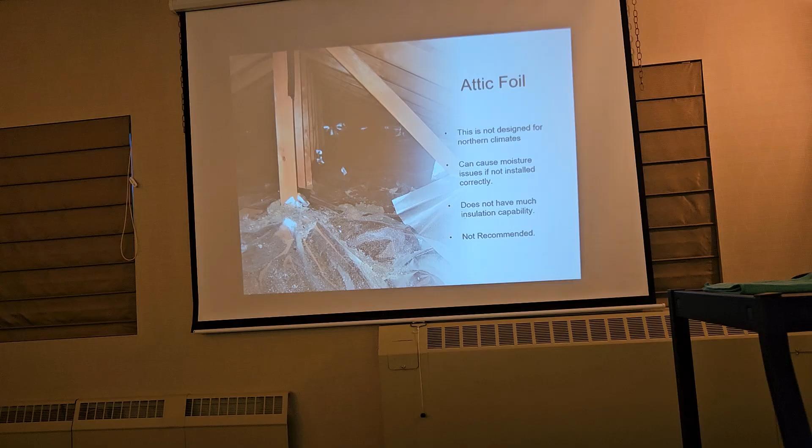Here's why. So this is after lifting, here's the foil right here. Pull up the foil, it drops water under it.

So let me ask you this - is that a bad product, or a bad application of a product? Bad application. That product is actually designed to go on the bottom of the rafters on the roof deck, to keep the heat in the channel so the ventilation can take it out. It's a radiant barrier. The companies doing this were just rolling it out in the attic, charging people $3,000 to $4,000 and saying see you later, enjoy our taillight warranty. And they changed their numbers within like 2 weeks and you never hear from them again. So, glad you guys all know what that's about.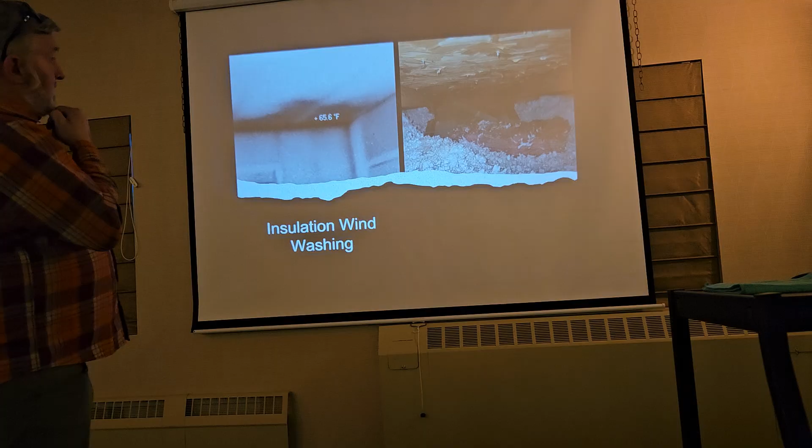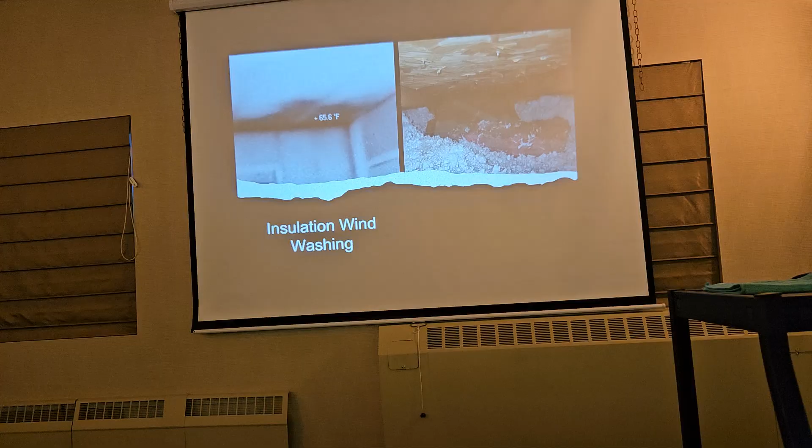So this is wind washing - the lighting on this is weird. This is what this looked like from the inside, looking up at the ceiling at the outside wall here. No insulation basically on that outer edge. And this image actually shows here's your truss, this is bare drywall. The wind got into the soffits, blew the insulation away, moved the insulation, so now we've got a cold spot, a bare spot.

1940s and 50s, primarily knee wall cubby attics. You get upstairs, you've got the slanted ceilings, walk in behind there and you see that. And they wonder why they have ice damming problems.

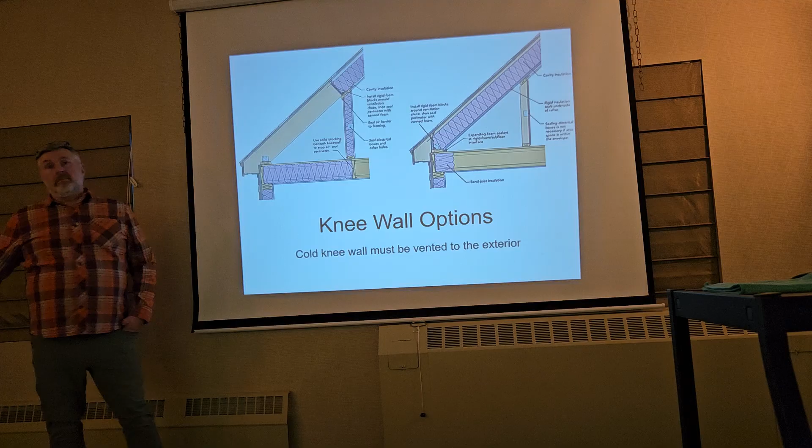Here, this is all conditioned, so we don't care. You gotta create your separation points. The other big one that gets missed in this application a lot - that's an attic, right? Don't we have to vent attics?

You have to vent those things. Plan A is we're gonna stop as much as we can possibly stop with air sealing and insulating and all that stuff, knowing full well we can't stop 100% of everything ever. Plan B is make sure that whatever does get in there has a place to go. So there you'd probably put a little gable vent on each end, or you could feasibly, if there's room, continue that ventilation up the top.

Do you think the best way to insulate those areas is dense pack? The floors, you mean, or the tops? Yes. So floors, yes. Tops, depending on thickness. You know, a lot of those 40s houses were only 2x4s. It just doesn't leave you much.

So you can dense pack them or you can foam them, and foaming them depends on how long they are. If there's, some of them are only like 2 foot, we can get your foam gun up in there and probably accomplish that. But if they're longer than that, foam is not gonna be a very consistent application in that scenario. If the people are remodeling those spaces, I generally encourage them to fur those down to gain some more space, and then you can do things properly.

Any other questions on knee walls? So this is a different kind of wall, still an outside wall, but this is where your vault meets your flat attics. So this is your vertical surface.

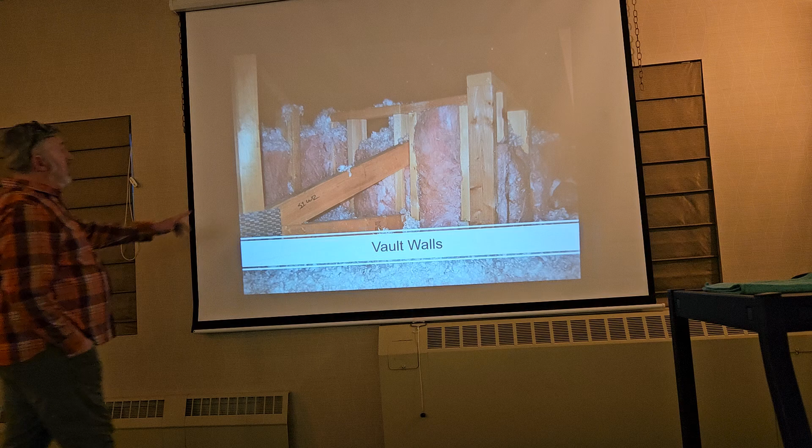There's a couple problems with what they did here. They sort of put a couple top plates in, kind of, sort of. There aren't any here. They kind of put them there, but they're way too high. So basically, those walls have no top plate.

Has anybody ever pulled a piece of fiberglass apart and seen how it comes apart in layers? The intent there is to stop things perpendicular to those layers. If those layers are open at the top, as that heat gets into there, it's gonna rise up through those layers and just dump into the attic.

So basically what happens here, these should also have been encapsulated, because remember what I said about fiberglass earlier? The only place it ever belongs is in a fully encapsulated cavity with no air entrainment. So not only did this not get backed properly, it also didn't get capped properly. So basically that's about a 2.5 sided assembly. So that thing's gonna be a mess.

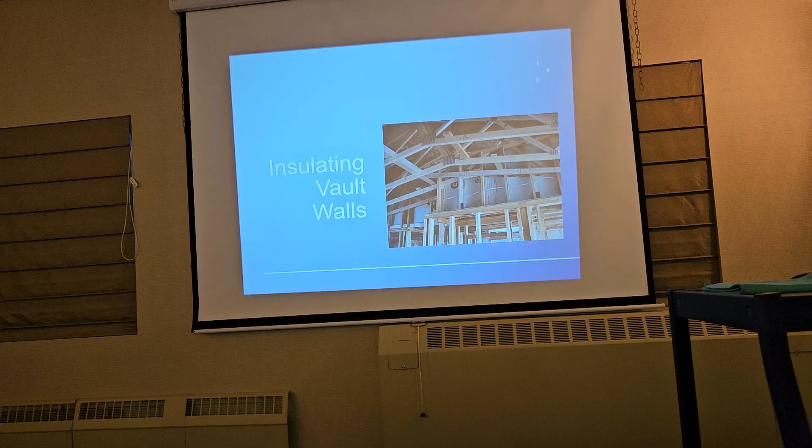Took this picture at one of my builder's jobs before they finished it. So what he does is he backs them with rigid, and then they come in and fill them, and then when they do the attics, they spray foam the junctions. So fully encapsulated, fully thermal broke - proper way to do a vault wall.

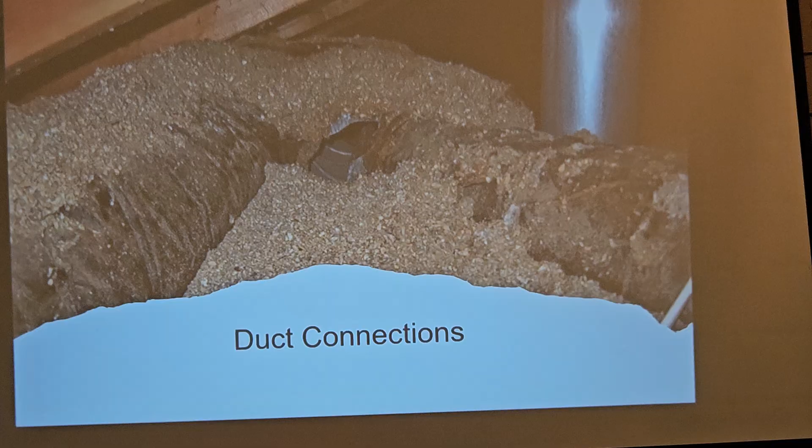Attic ducting, that one's gonna work really nicely. That attic was probably as warm as the rest of the house. Flex duct sitting above the insulation line. Anybody know what the value of that black stuff is? You know what code is for ducting in attics?

R8. So that's what that is. So the heat source that's supposed to be conditioning your rooms only has an R8 on it, but they want the ceiling to have R50. Insulate the damn ducts - seal them up, insulate them.

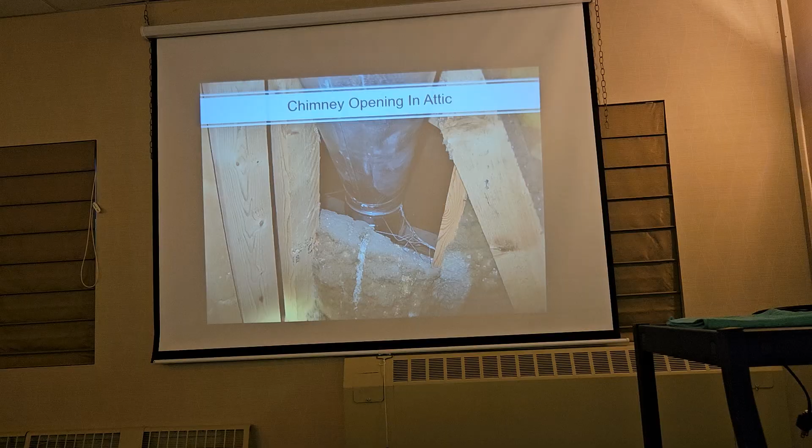The one I've seen multiple times is when the bathroom is, let's say, 6.5 feet wide, and your tub is 5 foot, so they build that little stubby wall. Well, the inside of that wall doesn't get drywall on the ceiling, so it's just a hole. And fireplace chases for gas fireplaces, they never get finished either - same thing, just a bigger hole up there.

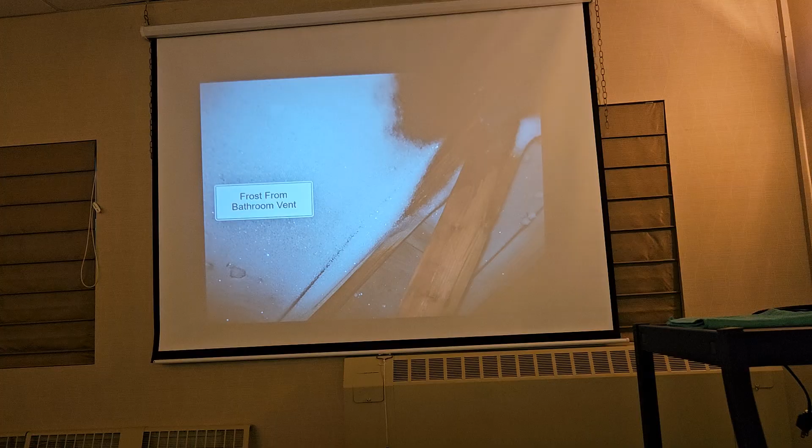When I did this test, I actually brought the homeowner a snowball down. Here you go, your bath fan's been pumping into your attic. I had one like that in the soffits where the vent was coming out of the soffit, and it just sucked right back up. I got one of those too.

I just looked at a condo where the first floor bathroom, kitchen exhaust, and basement bathroom were all vented into the attic. 1980s build. I thought, how much work must it have taken to get the basement vent all the way into the attic? The only reason I could see them doing that is if it was a brick or stucco house. It wasn't. I was standing in the basement and I could look right at it today. I could run a vent easier than getting it to the attic. There's a path right to the outside wall. Yeah, it took so much more work to get it to the attic.

North facing gables with massive amounts of water being pushed into that attic. Where does all that water end up when it warms up? On the ceiling of the bedrooms below, and then they call the roofer to replace the roof. After that 25 below zero spell, I bet you we had 30 calls of people saying they had roof leaks. It was just raining in their attics.

Just some really nice applications here. And again, you guys have probably seen all this stuff, or variations of this stuff. Don't move the board, just smash the ducting in there.

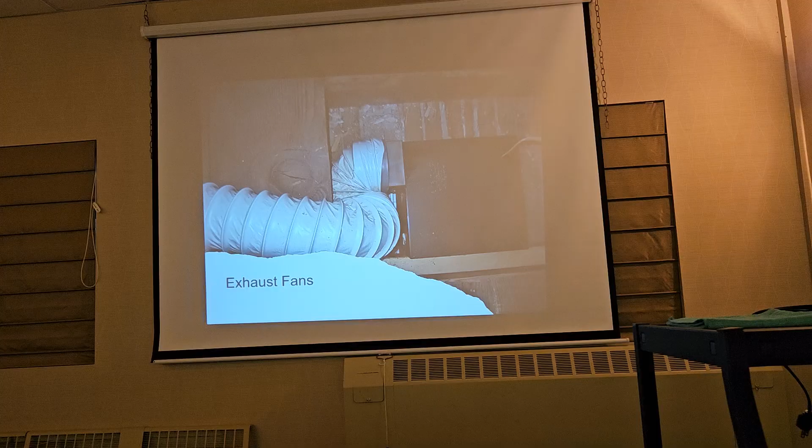How about a solution like this? So the bath fan is actually right here, you can see just the edge of the collar. So what happens if we get condensation in there? It's a plumbing pipe, it's made for water. As long as you've got an outward pitch on that thing, fantastic. Now, the only time this could be bad is if the power of the fan is in excess of the diameter of the pipe, you can get static electricity in there, so you gotta be careful when you do that. But from a moisture and airflow standpoint, almost zero resistance and already water protected. And it should be insulated.

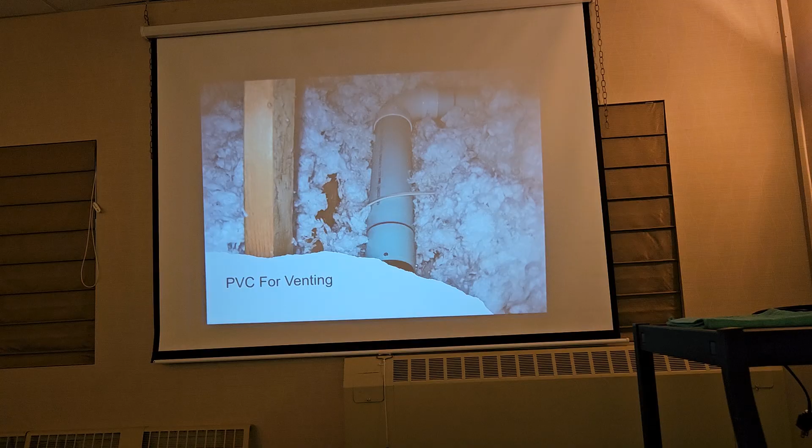I just took this picture the other day. You guys ever see these outside? Those round ones, there's a spring in there. I think those springs are rated at, I think you gotta have 70 CFM of flow capability to compress that spring down. And when you connect that to a 50 CFM fan and jam it into a 4-12 pitch soffit, that ain't opening. But let's just say in theory it did open. Where's that water gonna go? Where's that moisture gonna go? How about right in that soffit vent, and right back into the attic?

I just looked at a brand new build and talked to the builder, and he said he doesn't like to put them to the roof because that warm air melts the snow and causes ice damming. I don't disagree at all. But put it on the gable. I've never been, well, it was a hip roof, so on new stuff I've never been a fan of those because that warm moisture goes up, and 20 years later you see rotten sheathing.

A lot of new stuff today, they'll put them on the soffits, but they use non-vented soffit material for about 3 feet. I knew that's where you're going with that. It's weird because you will not find a code that says that, but you'll find some terminology in the code book that says you have to put it in a place where the air can't easily re-enter the attic space. So this is one of those codes that the code inspectors get to interpret however they choose.

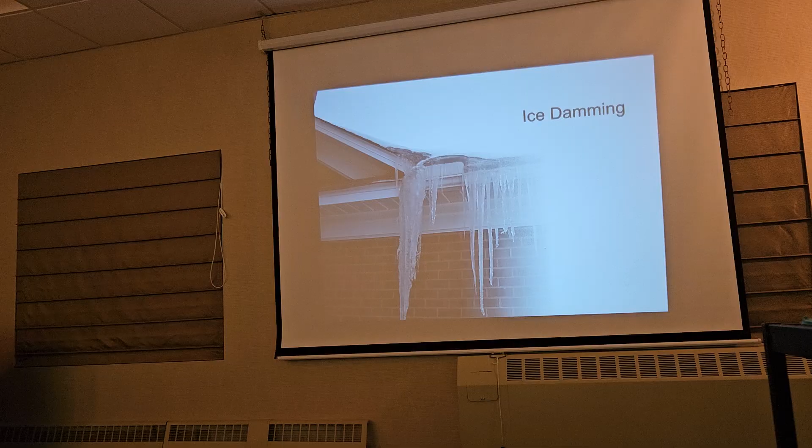Ice damming - we all know what causes that. I'm gonna touch on a few of those things, but essentially ice dams are heat loss. Heat loss getting to the roof deck, melting the snow, snow's getting to the edge, and reforming into ice. It is most times a combination of two things - heat loss combined with poor ventilation, or some variation of that.

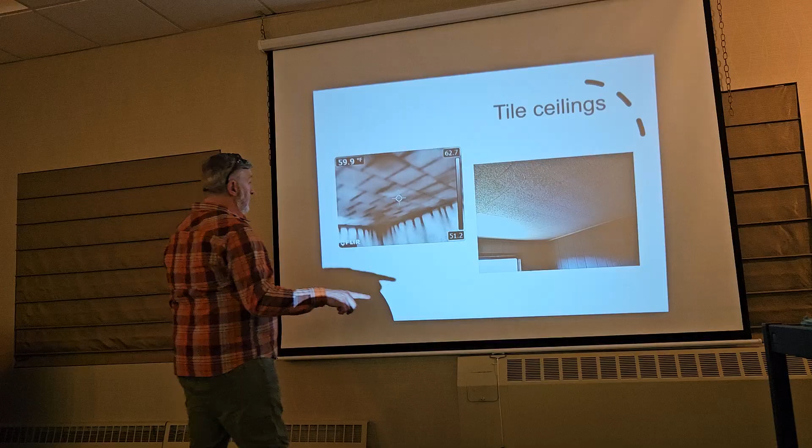I also just took this picture the other day. How many of you guys get into those 1950s, 1960s houses and you see these tile ceilings in there? When they install those, there's paper face matting in between the joists, and then they run furring strips every 12 inches all the way across the ceiling, and then they basically staple these tile ceilings up. This is what happens when you put a blower door to them - it might as well not be there. Absolutely dumping heat.

So you get two options. You get to either tear all that down and hang drywall up, or spray foam the whole back side of that thing - your budget's gonna dictate what option you get.

This is an interesting one that you guys will probably encounter from time to time. Again, I just took this picture on the 27th. I was over Menomonie, you can punch in those coordinates if you want. This was a 2-car garage stall, and on the other side of that sheeting is a 3rd stall with the roof line going the opposite direction. No ridge vent on the 3rd stall. Soffit venting, massive ice damming.

This sheeting - there was a ridge vent above this on the 2-car stall. The 3rd stall had no top venting, but it had some intake. So any heat that was happening in that zone was getting caught above the sheeting and had nowhere to go. So it was melting the snow. It just happened to be the stall the guy parked his truck in every night. There was no insulation on the ceiling deck, but the engine heat off his truck was enough to heat that space, get that cavity warmed up, and start melting roof snow, which created a massive ice dam in an unheated space - which is pretty non-typical.

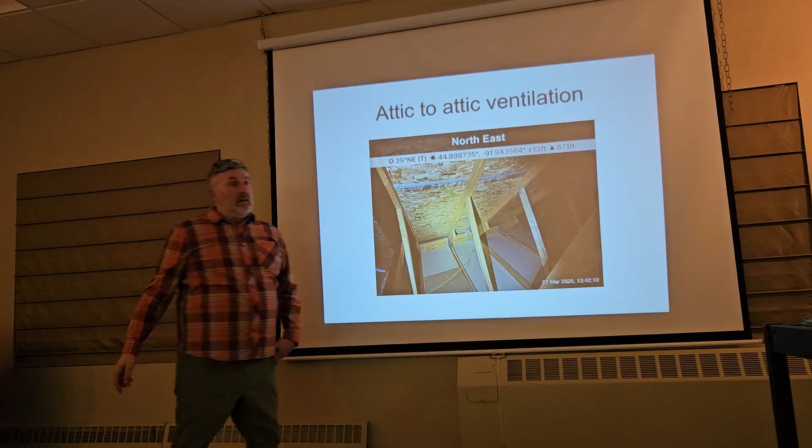What they need to do is cut some holes in that thing and allow those 2 attics to communicate. And I see this a lot, where ranch houses - they build the house first, they attach the garage on next, and they leave all the sheeting in the way. Those roofs have to act as one, they have to communicate.

So as high up in those things as you can get, they gotta cut some holes to allow that heat to dissipate in and out of there, because every roofer you talk to will say, oh, if the garage roof is this high but the house roof is this high, I can't put ridge vent on there because it'll become an intake. I don't disagree with that, but let's cut some holes so that all the heat that gets stuck in here can actually get out. But with all that sheeting in the way, it just creates this hot pocket all the way along there, and it can't go anywhere.

Look at that, he made it through 106 slides.

Any other things you guys have encountered that you want to ask me about, or anything else?